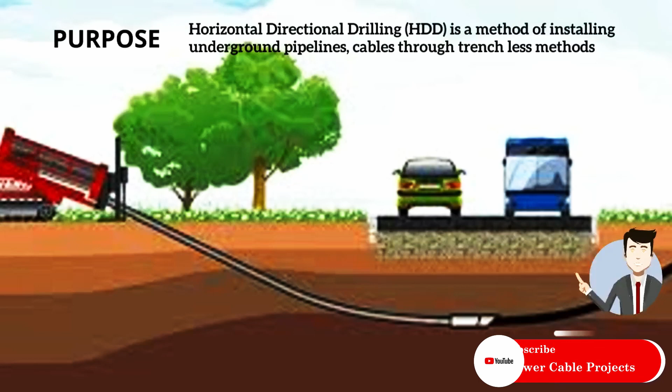Purpose. Horizontal directional drilling, HDD, is a method of installing underground pipelines and cables through trenchless methods. Scope of work. The work covers soil investigation, survey, asphalt cutting, excavation at entry and exit point and installation of HDPE pipe.

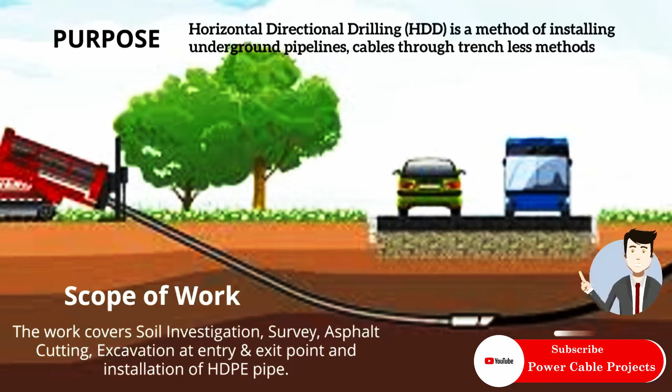Responsibilities. Site manager shall direct when and where to start the HDD and establish deadlines for activity to be finished. He shall make sure that HDD works shall be finished within the time frame set forth on the construction schedule. Site engineer shall be responsible for the execution of the HDD works. Surveyor is responsible for establishing the boundaries, location, limits and extent of HDD works.

Procedure. The foregoing procedure for the HDD works will serve as a guide by the site engineer together with the surveyor along the course of their work in order to achieve an acceptable quality of workmanship and attaining the optimum results with less time and effort.

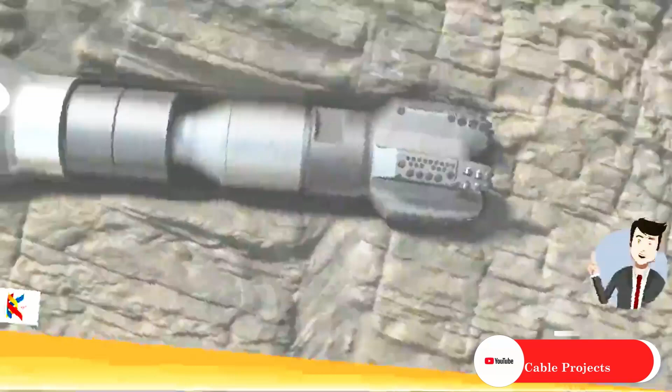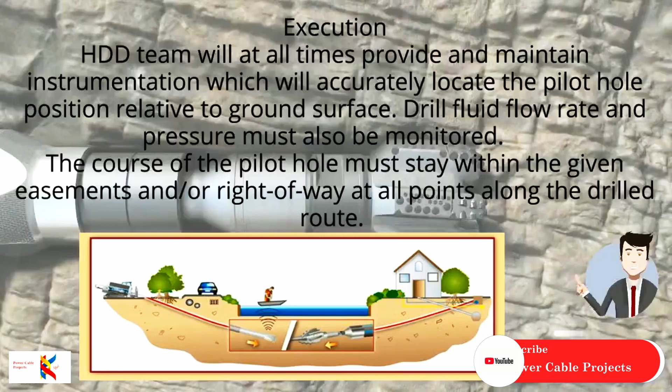Execution. HDD team will at all times provide and maintain instrumentation which will accurately locate the pilot hole position relative to ground surface. Drill fluid flow rate and pressure must also be monitored. The course of the pilot hole must stay within the given easements and or right-of-way at all points along the drilled route. HDD team shall have accurate working gauges, which register tensile force being used to pull the conduit back through the reamed borehole. It is the HDD team responsibility to prepare the reamed out hole such that pulling back operations do not exceed the tensile strength of the conduit.

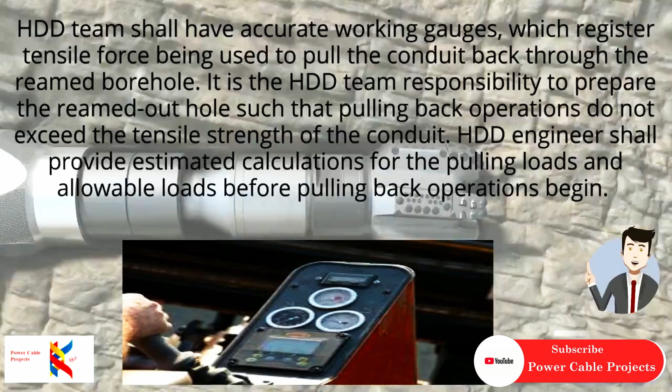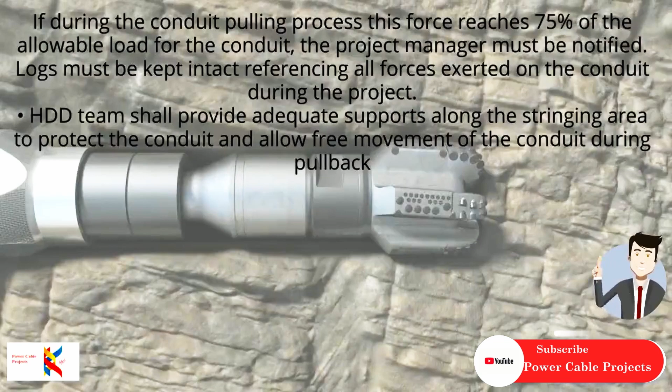HDD engineer shall provide estimated calculations for the pulling load. If during the conduit pulling process this force reaches 75% of the allowable load for the conduit, the project manager must be notified. Logs must be kept intact referencing all forces exerted on the conduit during the project.

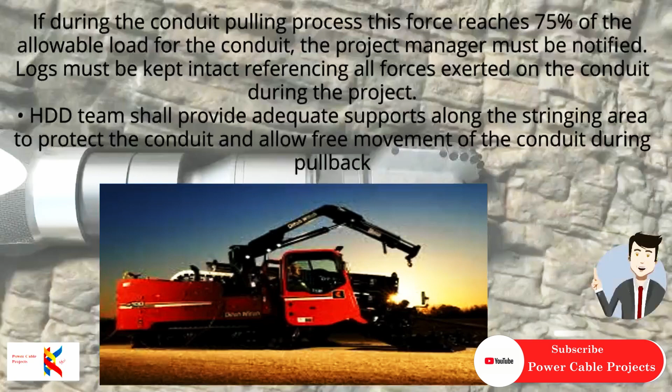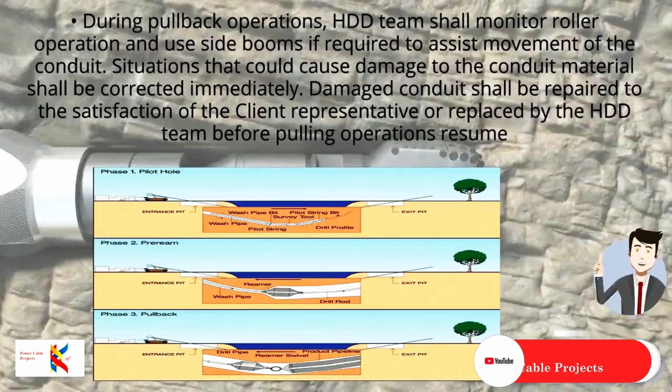HDD team shall provide adequate supports along the stringing area to protect the conduit and during pullback operations, HDD team shall monitor roller operation and use side booms if required to assist movement of the conduit. Situations that could cause damage to the conduit material shall be corrected immediately. Damaged conduit shall be repaired to the satisfaction of the client representative or replaced by the HDD team before pulling operations resume. Re-reaming. Re-reaming operations shall be conducted at the discretion of the horizontal directional drilling team.

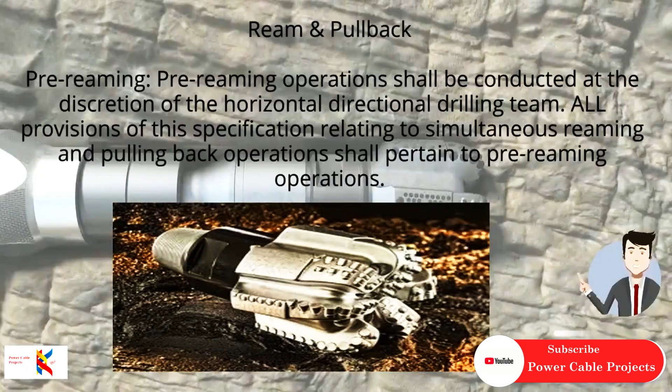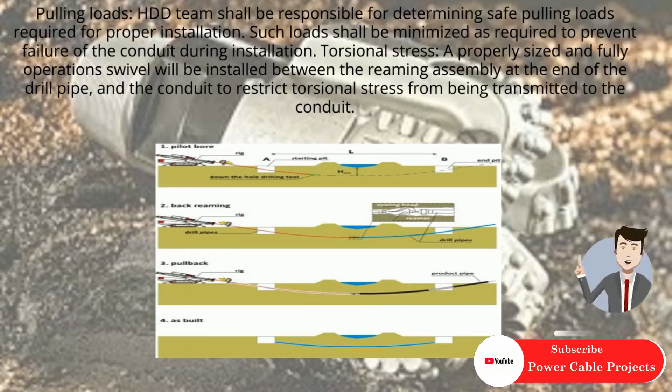All provisions of this specification relating to simultaneous reaming and pulling back operations shall pertain to pre-reaming operations. Pulling loads. HDD team shall be responsible for determining safe pulling loads required for proper installation. Such loads shall be minimized as required to prevent failure of the conduit during installation. Torsional stress. A properly sized and fully operational swivel will be installed between the reaming assembly at the end of the drill pipe and the conduit. Restoration.

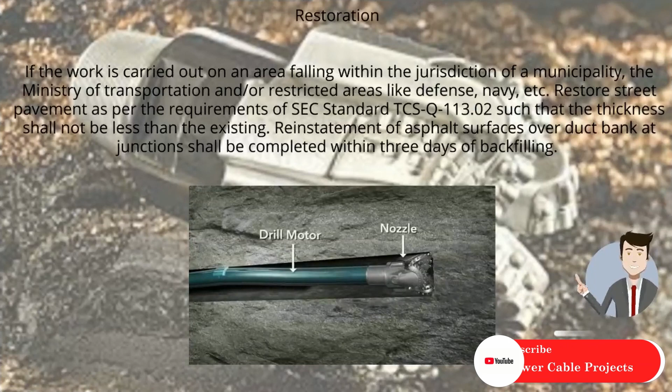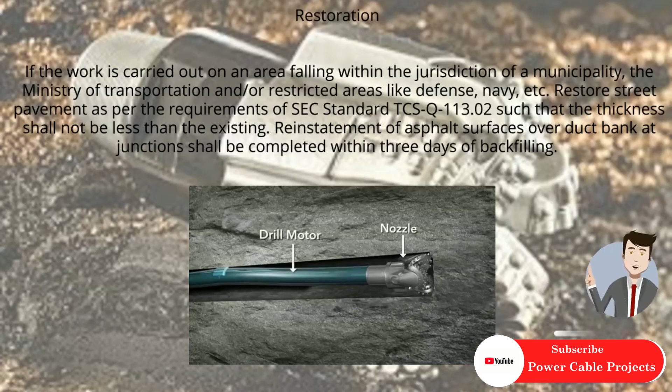If the work is carried out on an area falling within the jurisdiction of a municipality, the Ministry of Transportation and/or restricted areas like Defense, Navy, etc., restore street pavement as per the requirements of SEC Standard TCSQ 113.02 such that the thickness shall not be less than the original. The HDD team is responsible for leaving all areas affected by construction activities in a condition equal to or better than the condition before construction.

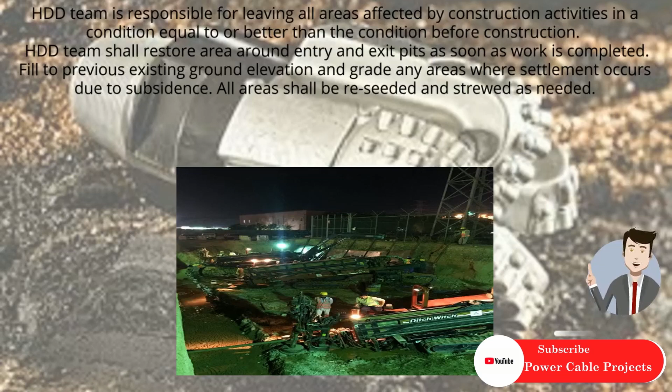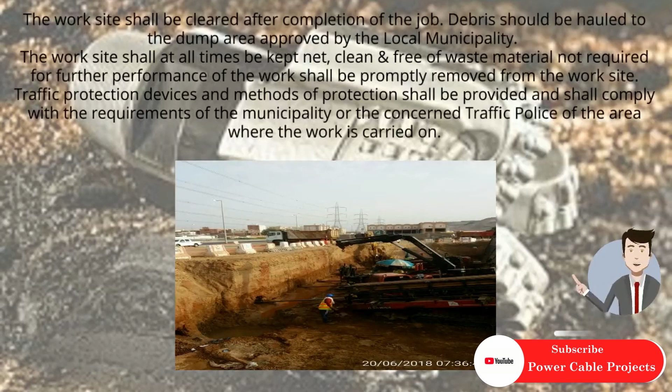HDD team shall restore area around entry and exit pits as soon as work is completed. Fill to previous existing ground elevation and grade any areas where settlement occurs due to subsidence. Site shall be cleared after completion of the job. Debris should be hauled to the dump area approved by the local municipality. The work site shall at all times be kept neat and clean, and waste material not required for further performance of the work shall be promptly removed from the work site.

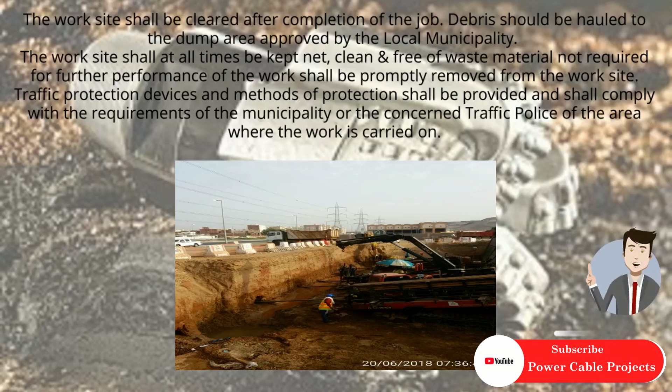Traffic protection devices and methods of protection shall be provided and shall comply. The traffic flow shall be maintained as required in the vicinity of the work site. Flagmen, barricades, warning signs and warning lights shall be provided as required. All materials, equipment and safety items shall be placed or stored in an orderly manner at suitable locations to avoid traffic hazard.

Quality. The QA/QC engineer will monitor and ensure that this method statement shall be strictly enforced so that smooth workflow will be attained. The site engineer and surveyor shall ascertain the potential location of existing underground utilities that may be affected during the HDD works. Constant coordination shall always be observed.